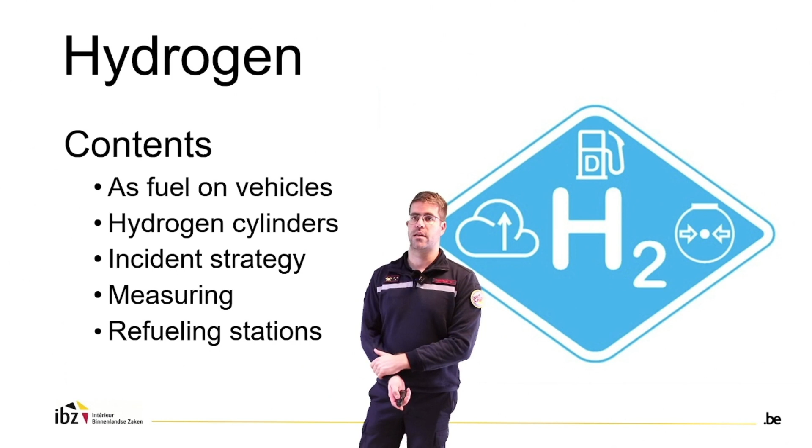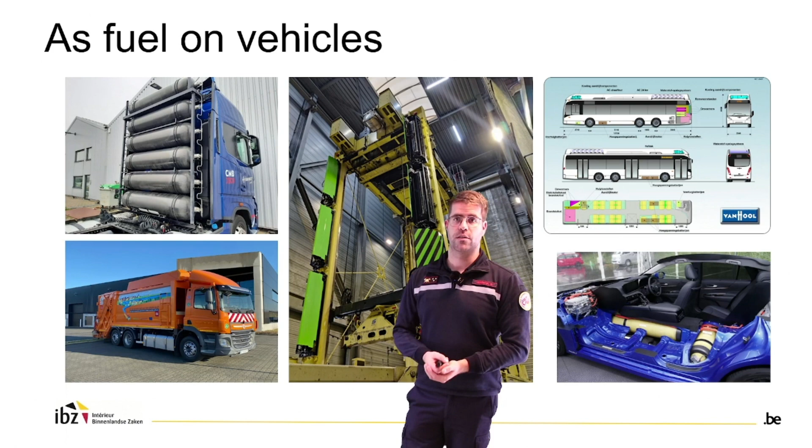To start, here you can see a few vehicles that are possible. It varies from regular cars up to heavy machinery, trucks, etc.

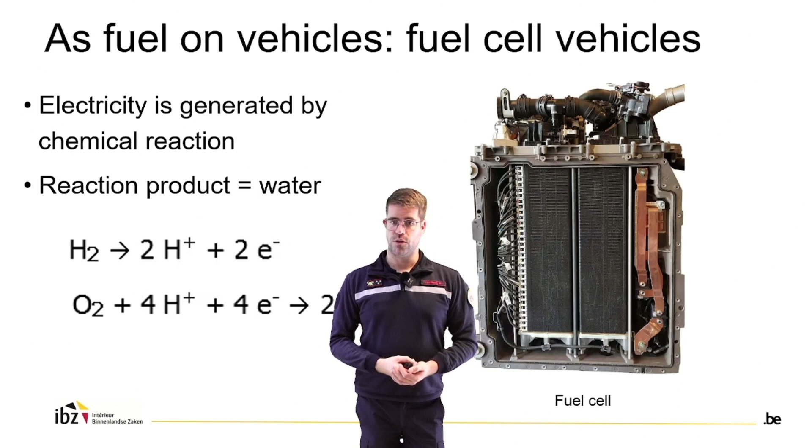First of all, these vehicles can be propelled with a fuel cell. In case of a fuel cell, it's in fact an electric vehicle, and the electricity is produced in a fuel cell. In this fuel cell, you can see one here, there is a chemical reaction between the hydrogen gas and the oxygen gas from the air, and the reaction product is just water, and we get electricity by this reaction.

The hydrogen is stored between 350 to 700 bars in the tanks. We can see a few tanks in this car, 3 tanks in total. This is a fuel cell car, so we have a fuel cell, and the fuel cell generates electricity, and this electricity is buffered in a small lithium-ion battery, and the electric motor propels the car.

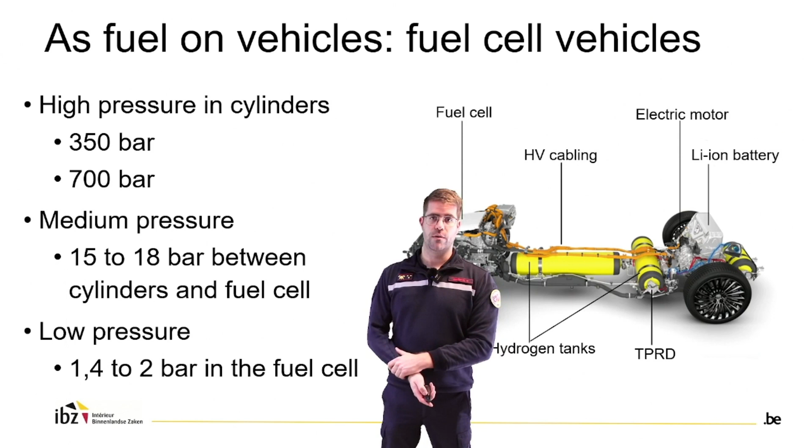There is also a medium pressure, and that medium pressure we can find between the cylinders and the fuel cell, and the fuel cell itself works around 1,4 to 2 bars in pressure.

A few examples of fuel cell vehicles. We can see just small cars. We can see a city sweeper used in inner cities to sweep the streets without emissions. We can see garbage trucks and a Van Hool bus, for example.

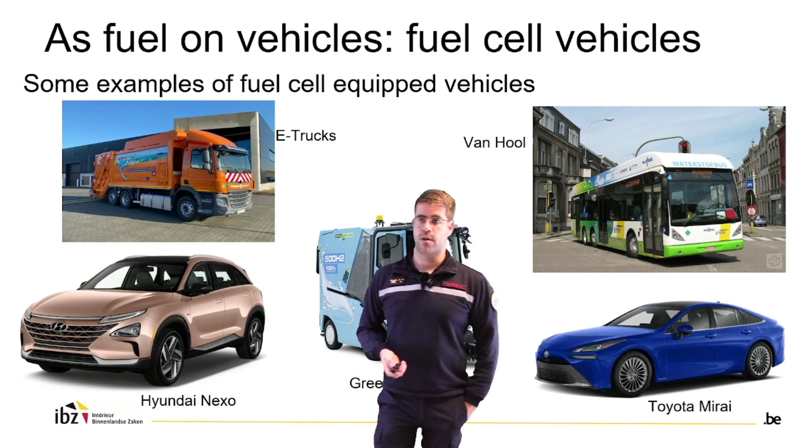We can also use a dual fuel system, and dual fuel is in fact a regular diesel engine that is converted to run on the combination of diesel and hydrogen. We do this so we can get a decrease in fuel consumption and also lower emissions.

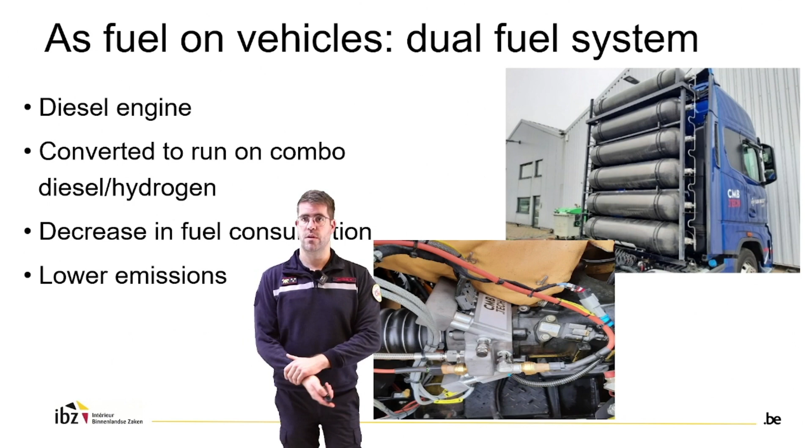We can see here an intake manifold of a diesel engine that is fitted with hydrogen injectors to let the motor run on the combination of diesel and hydrogen.

A few examples: we can see a regular truck that is converted to run on the combination of hydrogen and diesel, and here also a tugboat that is converted.

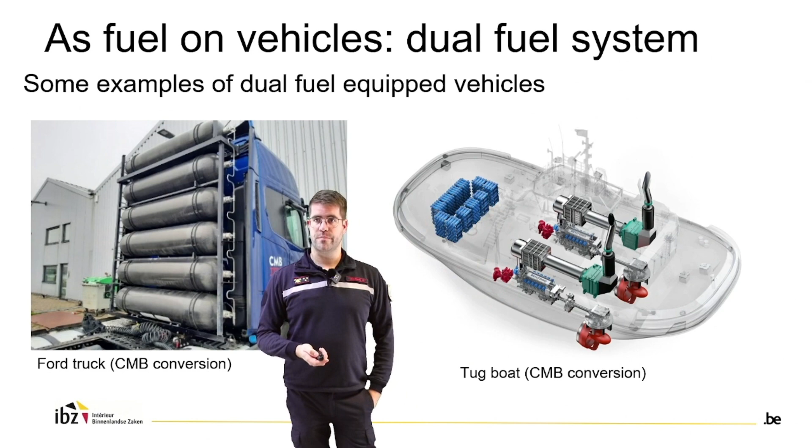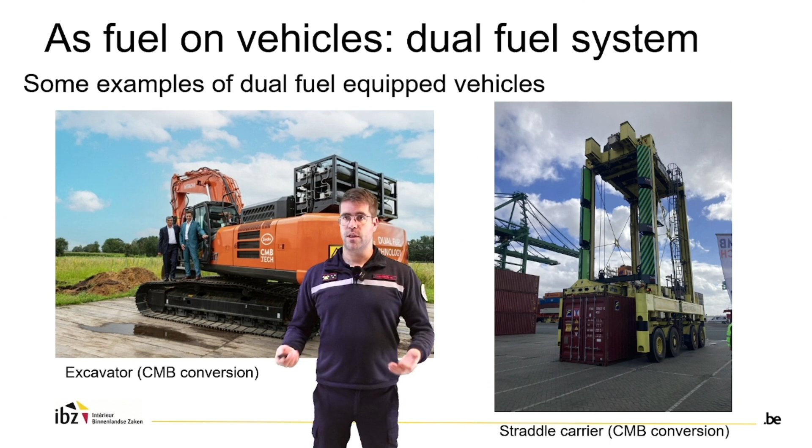An excavator can be converted, and as well a straddle carrier, like we can see here. We see this as a way for the energy transition, a way to equip heavy machinery with motors that can run on less fuel and less emissions until these can be made fully electric or even in other ways.

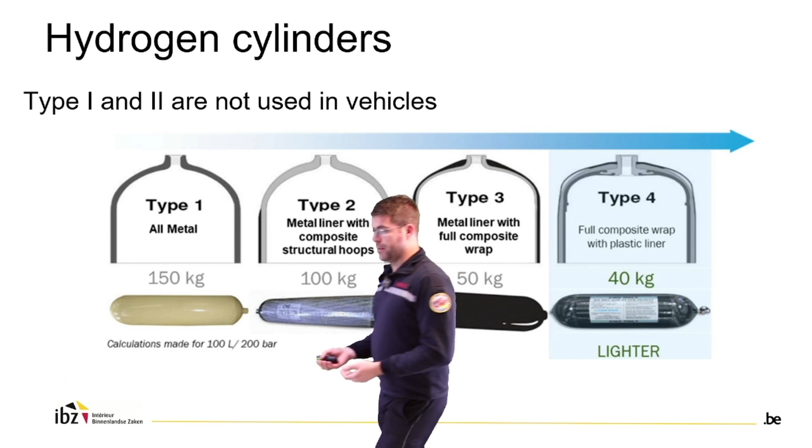These 2 types are not used in vehicles. When we take a look at the vehicles, we see type 3 cylinders and type 4 cylinders. A little bit more about those.

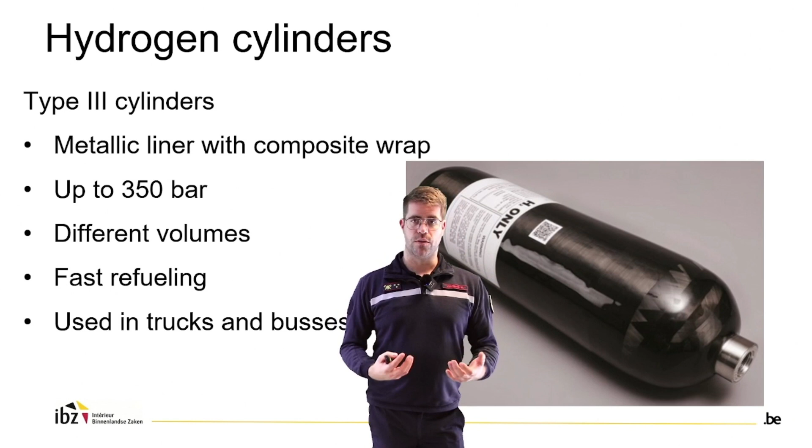Type 3 cylinder is a composite cylinder with a metallic liner, and it can be used up to 350 bars of pressure. It's available in different volumes. You can use it for fast refueling, and it's mostly used in trucks and buses.

The type 4 cylinders are fully carbon with a plastic liner. These can be used up to 700 bars of pressure. They are lighter, up to 70% lighter compared to the type 1 metal cylinders. And they are compact, therefore mostly used on cars.

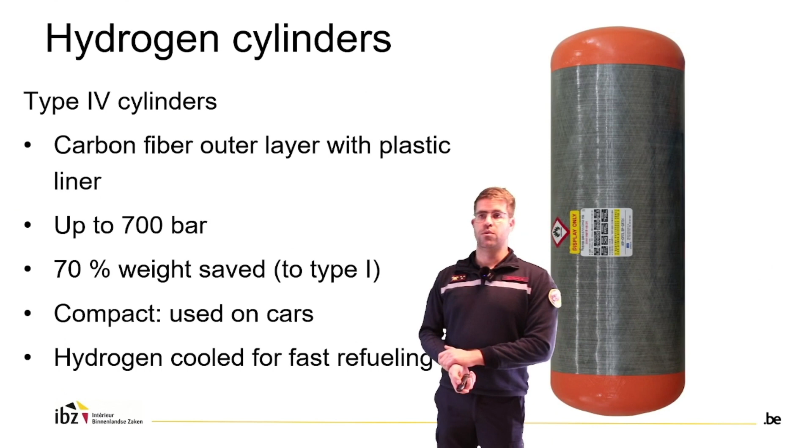They can be used for fast refueling, but it's important that the hydrogen needs to be cooled before it can be fueled into the car.

As Matthias told before, the cylinders are protected by a thermal pressure relief device. This is a device, a valve that opens at about 110 degrees centigrade. The flow of the blowdown is determined by the diameter of the TPRD and the pressure in the tank. There can be one TPRD on a tank, but there can also be multiple.

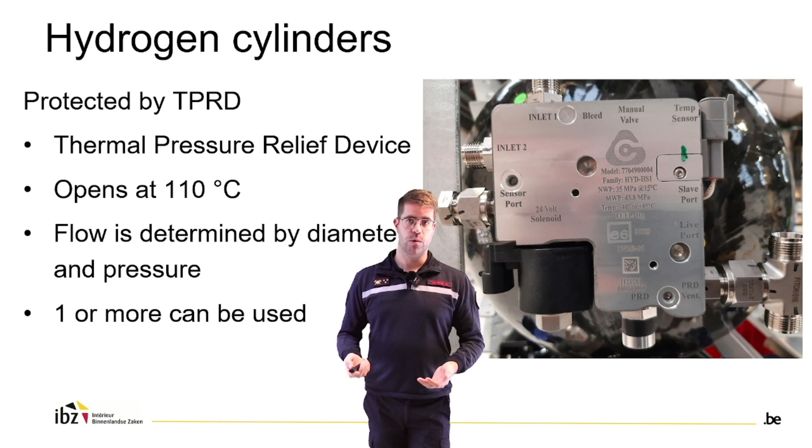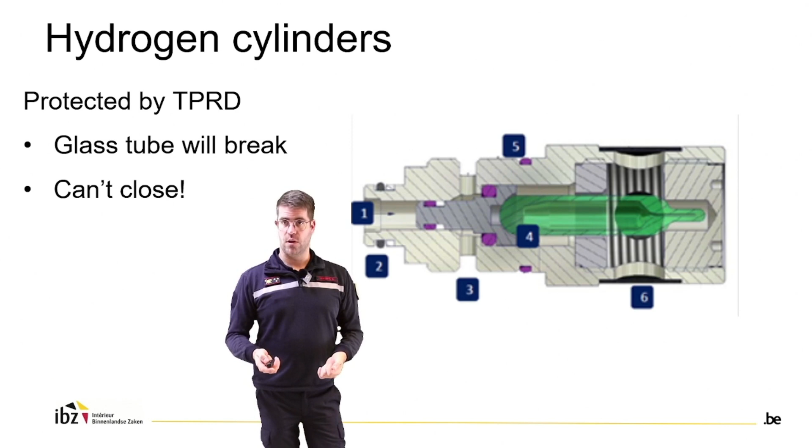So how a TPRD works is a bit comparable to a sprinkler head. There is a small glass tube inside the valve, and when it breaks at a certain temperature, it will open and it cannot close. It will blow down the complete tank. We can calculate how long that blowdown process takes.

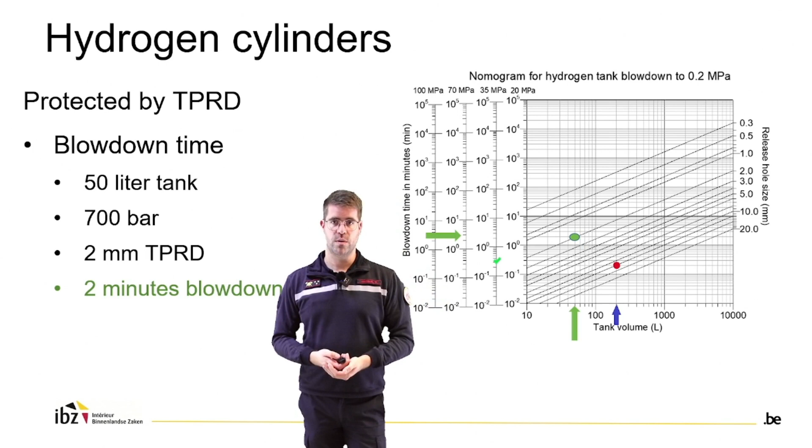For example, a tank we commonly see in vehicles like this. We have a 50-liter tank, a 2 millimeter diameter TPRD at a pressure of 700 bars. And when we look at the graph, we can see that blowdown will take about 2 minutes from full tank to empty.

So on most regular cars, the blowdown will be to the downside of the car, downwards release. But this is not always the case, especially when we go to the bigger vehicles and heavy machinery. It can be either direction, so it's something we need to take in mind.

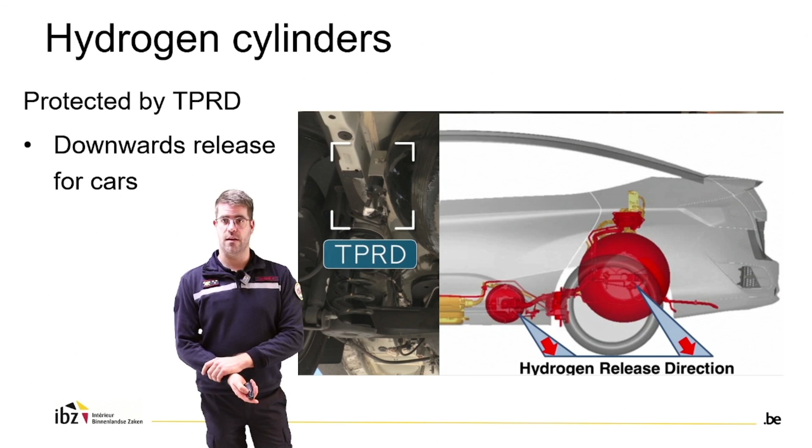What is our incident strategy? First of all, we use the basics we use for every hazmat incident. So we maintain a distance of at least 50 meters. And when there's a significant fire hazard or in unclear situations, we maintain a distance of 100 meters. And it can be up to 500 meters if there is explosion risk, for example, with a tube trailer.

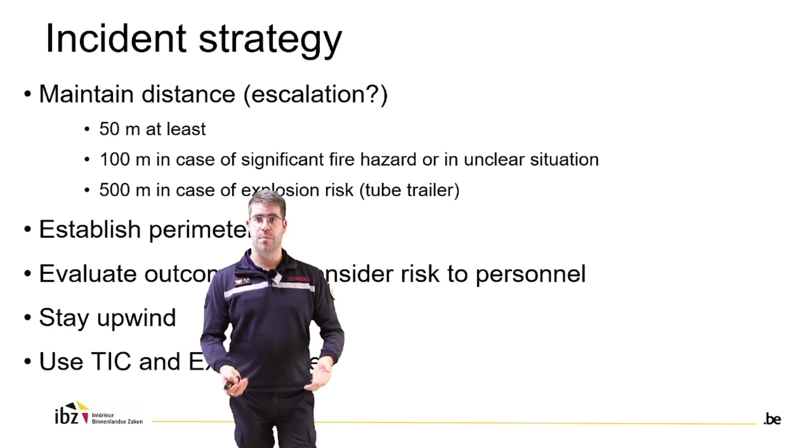We establish a perimeter, we evaluate the possible outcome of the incident, and we consider the risk to our own personnel on site of the incident. We try to stay upwind. We use a thermal imaging camera and explosion oxygen meters during the incident.

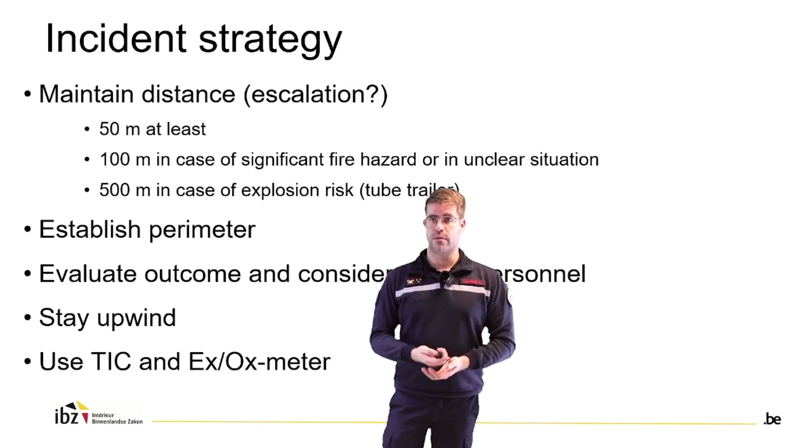We have collapse of walls, debris and 1% hearing damage up to 13 meters. And lung damage and 1% fatality up to 1.65 meters. Keep in mind that this is in case of a physical explosion, so there is no fire involved in this case.

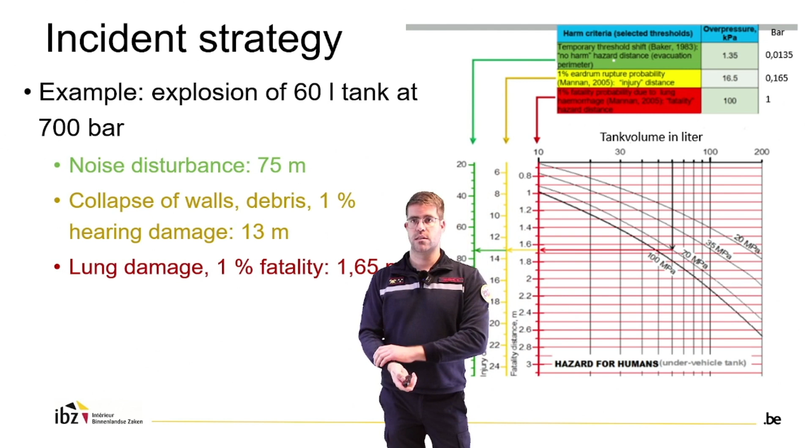Other general principles, like said before, we make use of a thermal imaging camera to detect the leak and the fire because it will be difficult to see just with your eyes. We will not approach a venting tank. We try to avoid ignition sources, and we try to ventilate in a safe way in case of a leak in a confined space.

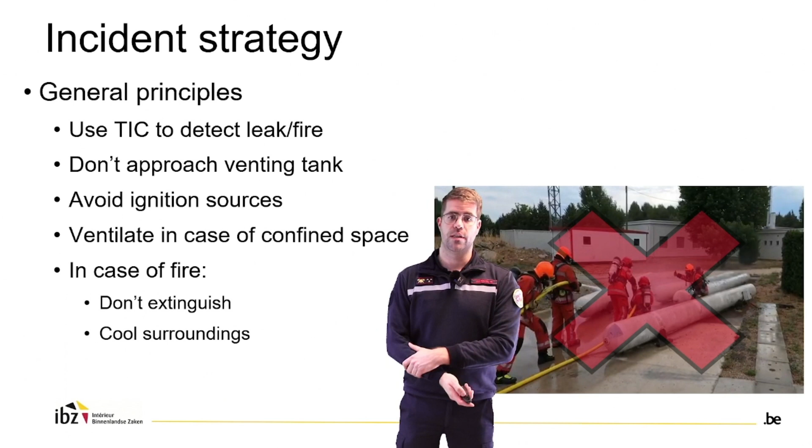If there is a fire, we cool the surroundings, but we won't try to extinguish the hydrogen flare. That's just comparable to other incidents with gas leaks.

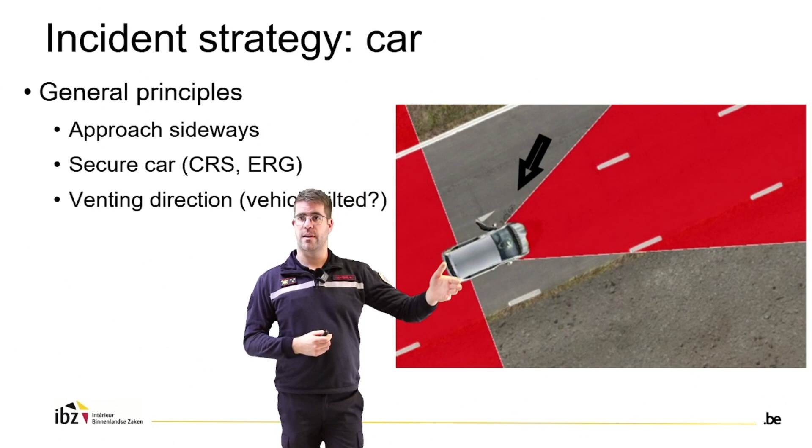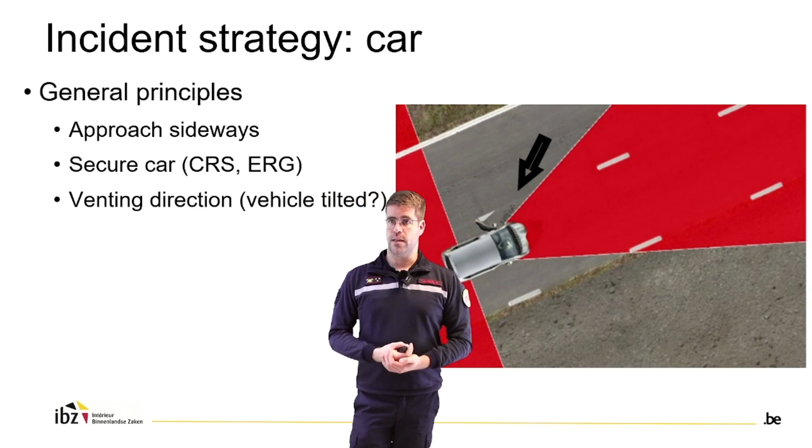If there is an incident with a car, we try to approach it sideways. Sideways is the safe zone around the car. We will look up how we can secure the car. We can use a crash recovery system or emergency response guidelines. And we need to think about the venting directions and keep in mind that the vehicle can be tilted.

If we have a car on fire, we will try to extinguish the fire and cool the tanks. Keep in mind that the TPRD can be activated and that there will be vent flames from the vehicle, and the length of those flares can be determined by the TPRD diameter and the pressure in the tank. If there is a flare, we won't try to extinguish the flare, we will just extinguish the vehicle and cool the tanks if that's necessary.

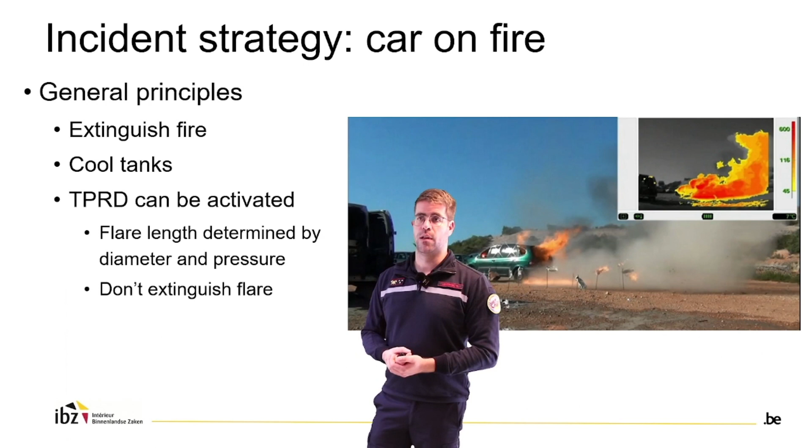But in most cases, the pressure will be released very fast if the TPRD is opened. You can also see in this picture that with just visible sight, the flame is not completely visible, but with the thermal imaging camera, it's very good visible.

In case of a hydrogen leak, there will be a very loud noise because we have to deal with very high pressures. We won't try to approach the venting tanks. We will avoid ignition sources. And if it's a confined space, keep in mind that an explosive mixture is certainly possible, and you need to try to ventilate in a safe way.

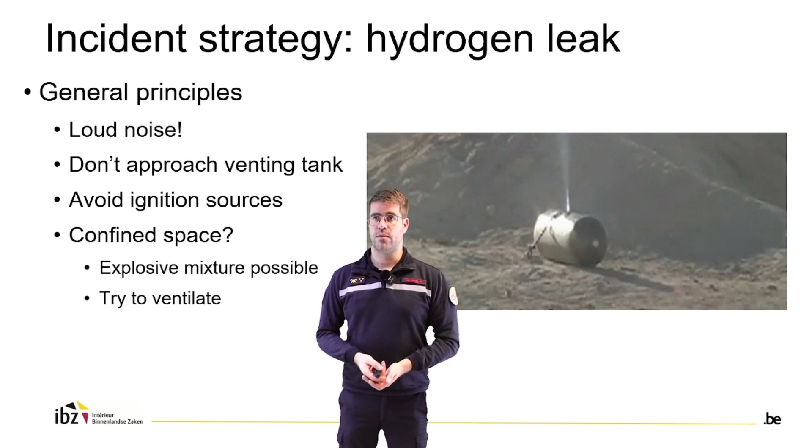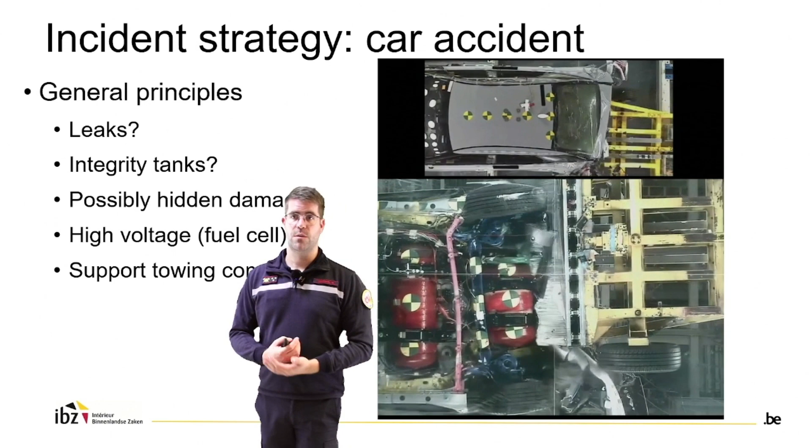If there is a car accident, there could be leaks, especially when there's a big crash. There are electronic valves on the tanks that will close if the car detects a collision. But you need to be sure about the integrity of the tanks. There could be hidden damage.

And if it is a fuel cell electric vehicle, you need to keep in mind that there are also high voltage parts and a lithium-ion battery on the car that could be damaged. Also important, after the incident, we need to support the towing company and tell them what kind of vehicle they have to deal with.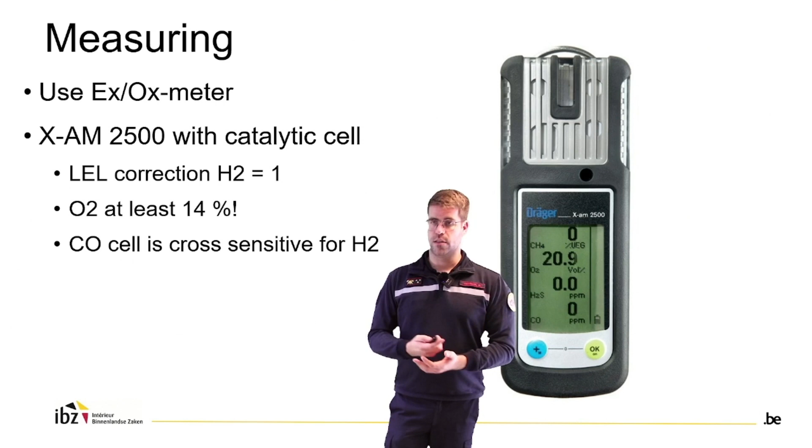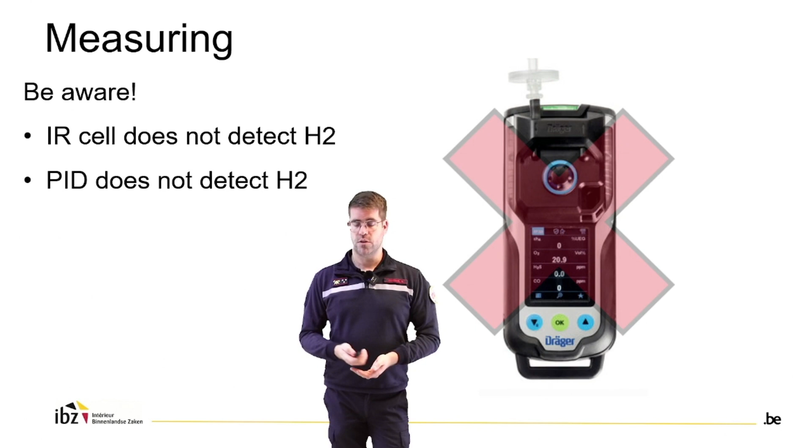Important to know is that the infrared cell, or even the PID, does not detect hydrogen. So those cannot be used during an incident with hydrogen.

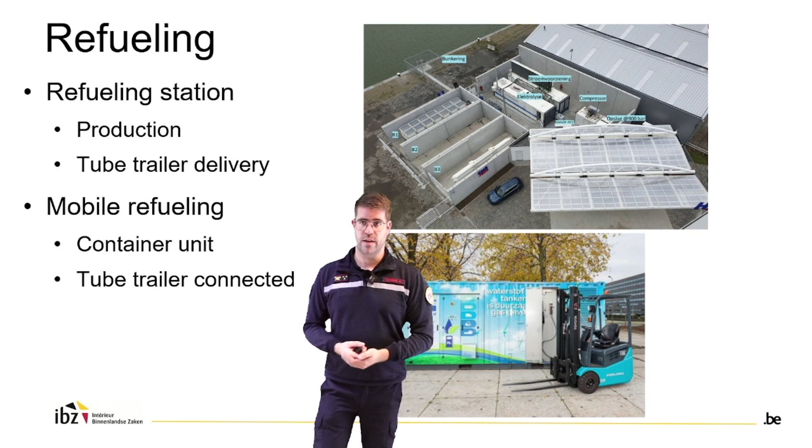Refueling of hydrogen vehicles, we have two big possibilities here. We have a stationary refueling station with maybe its own production, or a pipeline, or tube trailer delivery. Or we can have a mobile refueling station, a container unit that is connected to a tube trailer, for example, for large construction sites with heavy equipment that runs on hydrogen.

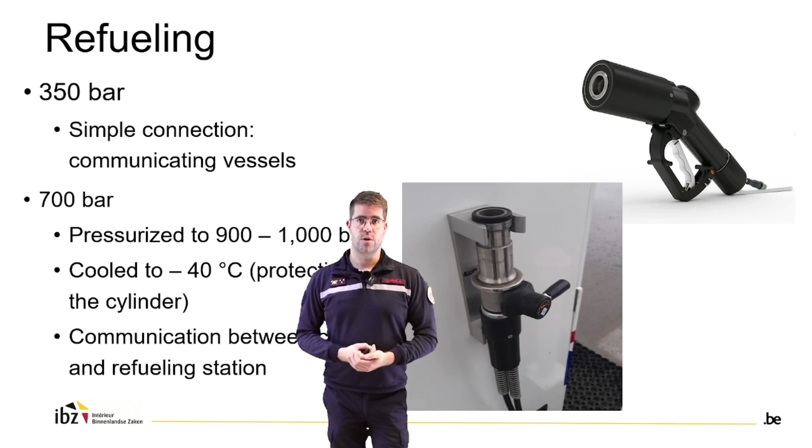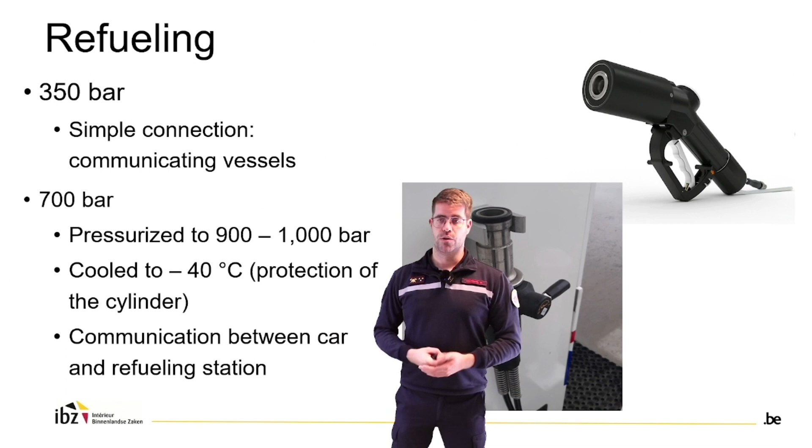Refueling can be done at 350 bars. So for the vehicles that work on 350 bars, it's just a simple connection between the buffer and the tanks on the vehicle, and it will fill itself according to the principle of communicating vessels. For the 700 bars, the buffer is at higher pressure, up to 1000 bars, and the hydrogen needs to be cooled beneath minus 40 degrees centigrade to protect the cylinder during the refueling process. Communication between the car and the refueling station is also necessary in this refueling system at higher pressure.

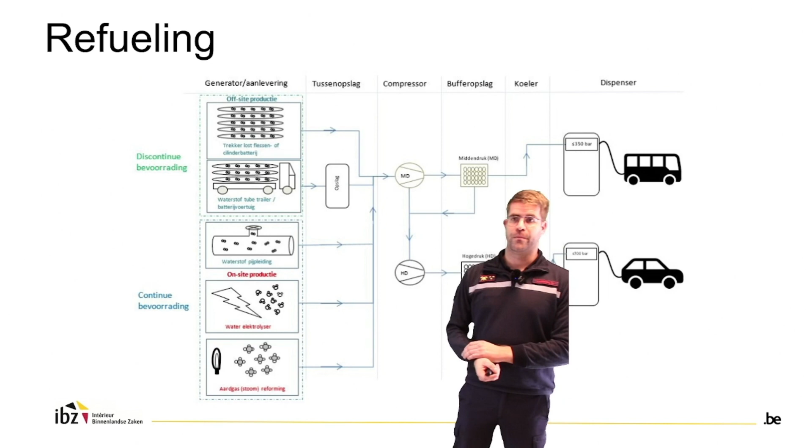So this is a small schematic example of those options. We have a fueling station at lower pressure that goes from the buffer directly to the vehicle. And when we have a refueling station at high pressure, we see that it goes to a chiller, and into the car.

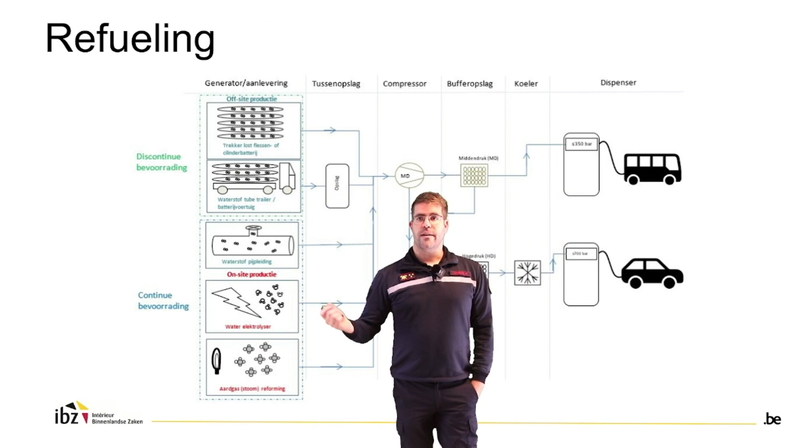Refueling systems have a lot of safety systems. Those are, for example, flame detection, gas detection, emergency stops, and even a blow-off installation in case of an emergency.

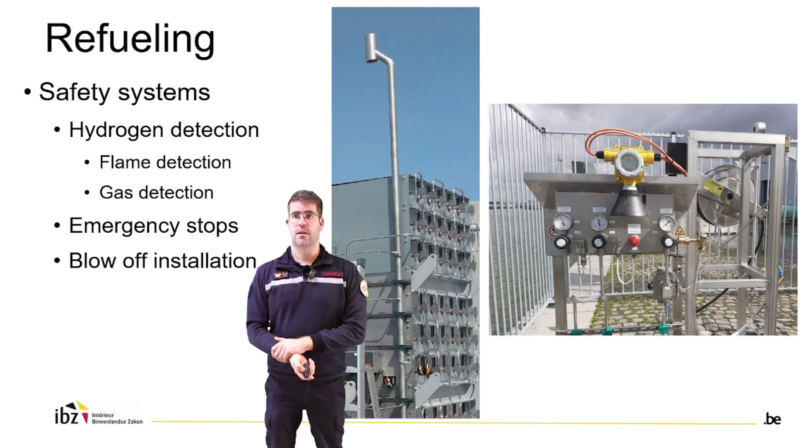When we take a look at our incident strategy during a leak in a refueling station, also again important: make use of your thermal imaging camera and detection devices. Involve external expertise. This is a very important step. These are complicated systems, and we as a fire department don't have all the knowledge that may be needed to deal with these systems. Determine the possible risk of the incident. Determine a safety distance. Use the available safety features in the refueling station, and think about possible escalation of the incident.

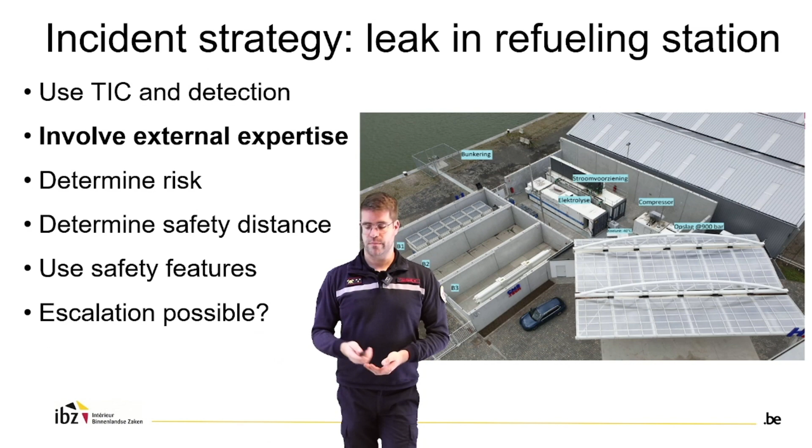In case of a fire in the refueling station, again, make use of your thermal imaging camera because the flames won't always be visible, certainly in daylight. Involve external expertise. Try to extinguish the fire to reduce the radiation to the tanks, but don't extinguish the hydrogen flames. Keep in mind that if there are tubes in the refueling system, or even a tube trailer, those don't always have TPRDs, so it may be necessary to cool the tubes. Try to do this with, for example, a monitor, so we can also evacuate our own personnel, preferably up to 500 meters.